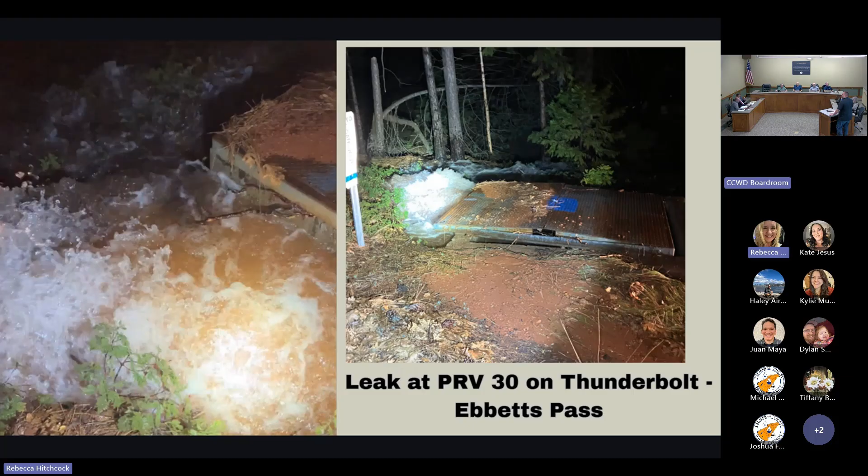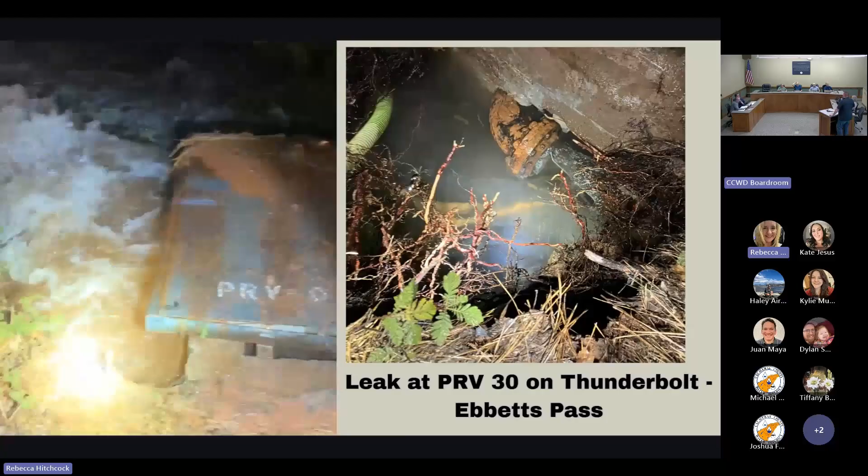Another video. When this first happened, there was about 250 pounds of pressure coming into this PRV. So when the line first blew, as you can kind of see, it picked up the metal lid on the vault and moved the lid off of the vault.

I think we got the alert because we were losing sawmill tank. So the guys went out and had to drive the area to try and find this. I believe Gabriel, our treatment plant operator up there, was driving down Mustang and actually heard it from his truck.

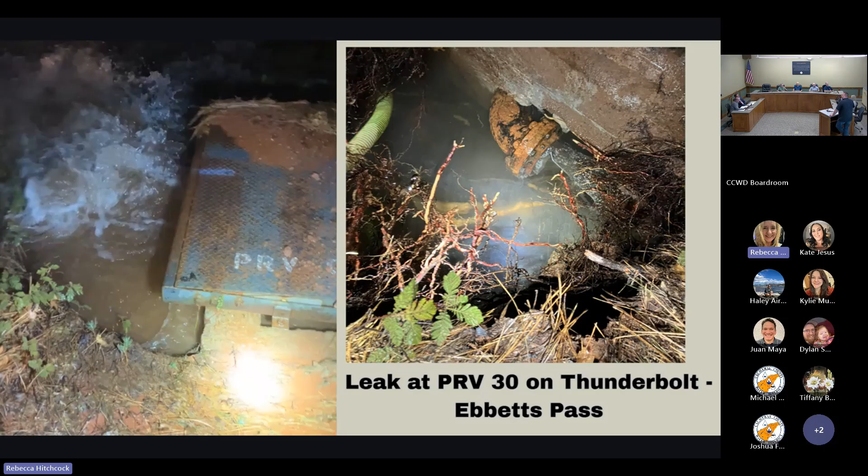That's how we located it. That was a 6-inch inlet line that feeds this PRV.

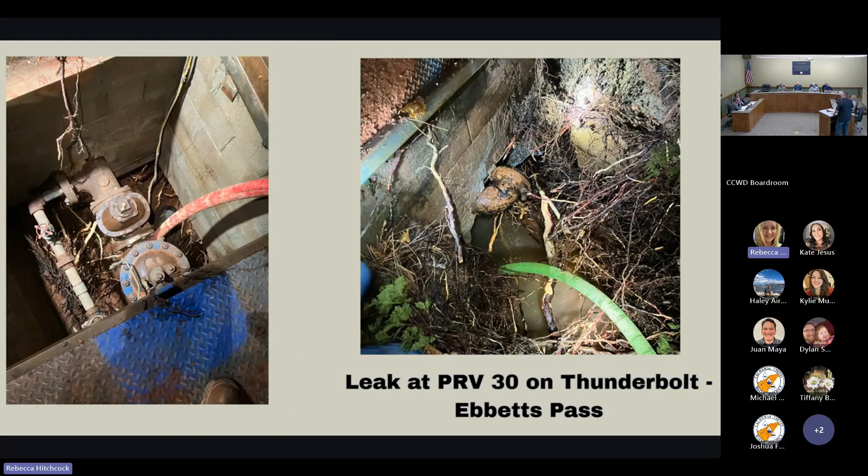When the guys first got there, you can kind of see the hole on the left. They had to dig that hole out about 12 to 15 feet deep. Once they got it shut down and isolated, they had to backfill that hole with road base just to get it to a level where they could get in there and work on it.

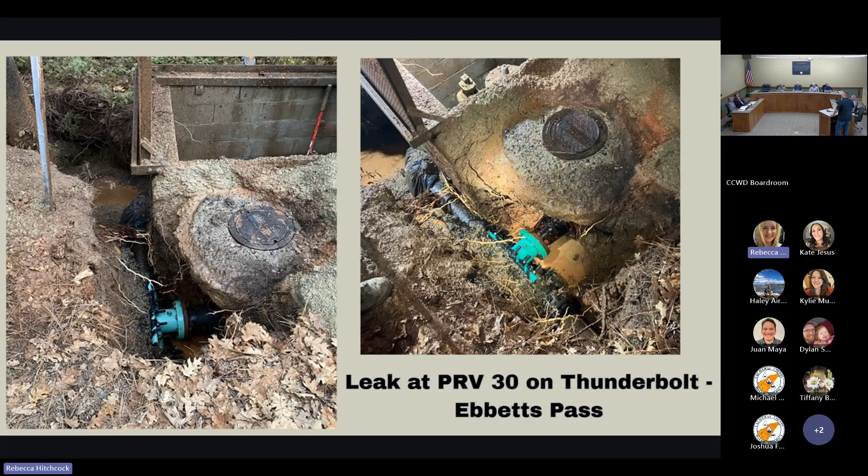You can see there's the hole there. It was an old 6-inch steel pipe that was pretty pitted and just rotten. We believe close to 700 gallons a minute were blowing out of that hole, so it was a lot of water.

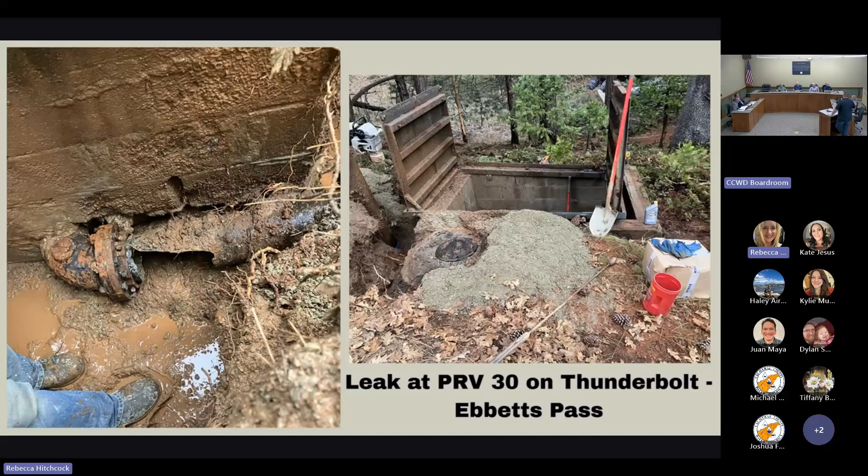Luckily, the area it was at, we had excellent drainage. Couldn't ask for better drainage for a situation like this. So that part was good. We didn't damage too much.

That means there's no claims for this. We didn't damage anyone else's property when that broke. We did not. Remarkable. So yeah, there's another picture of the hole in the 6-inch pipe.

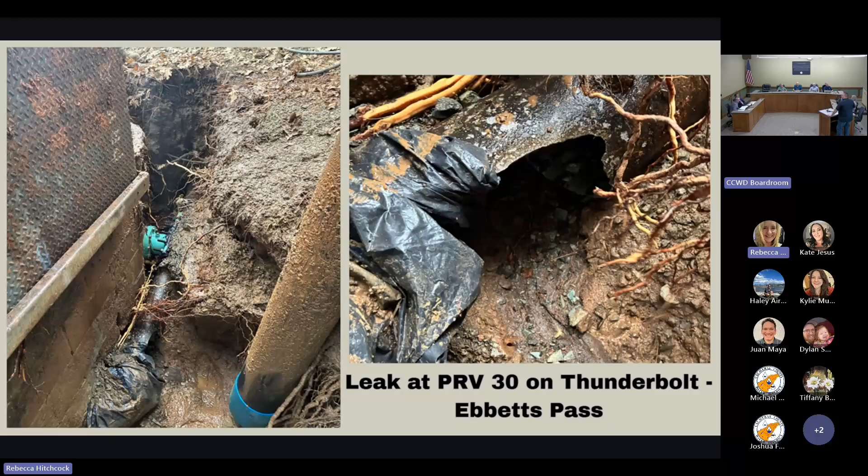How old is that pipe? Other stuff, probably the 70s. Yeah, early 80s. And we've got miles of pipe like that.

Oh yeah, we're going to be doing these every couple of months. Well, hopefully not. Yeah, hopefully not. We just got rid of a lot of the old steel down the Reach One project, so that's good.

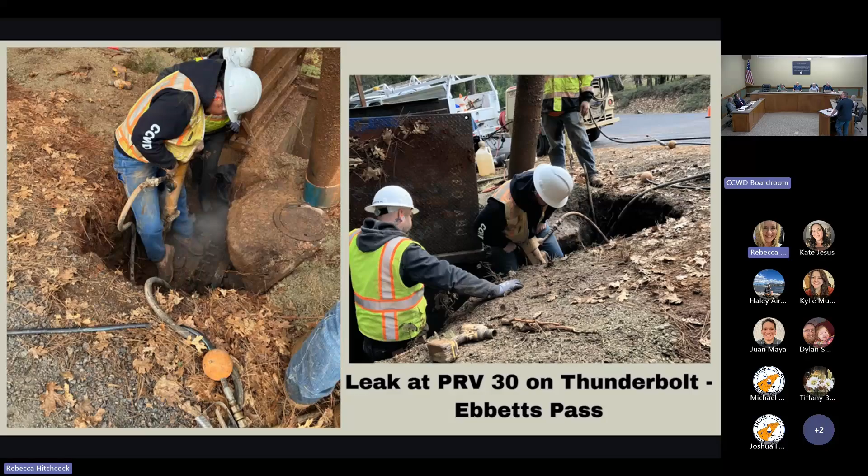So there's just the work efforts, guys trying to get in there to replace that section. There's the new section. If you can see on the picture on the right, there's a cutoff pipe up at the top of the picture.

That was the old temporary bypass for during construction. That's how they were feeding that. So when they put the new line in, that just became a dead end, so the guys just cut that and eliminated that section.

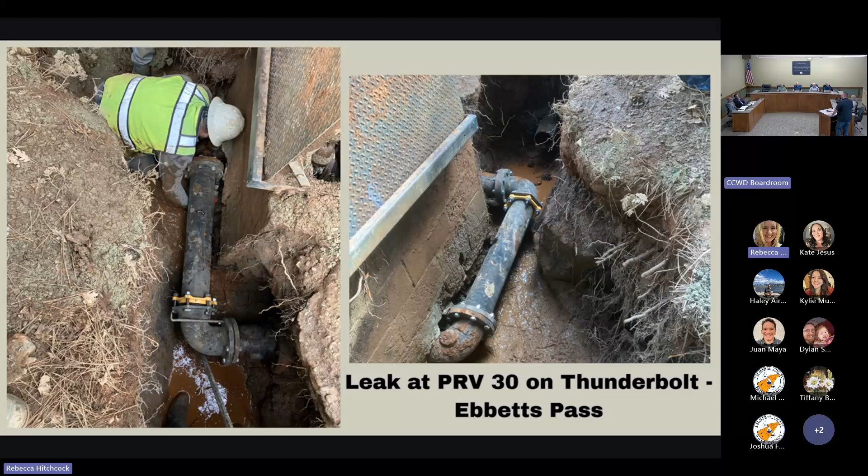There's another picture of the new install. Once they fixed that and charged the line back up, we realized there was an old 12-inch seismic fitting, a 90, on the other side of the PRV vault in front of it, and that was also leaking.

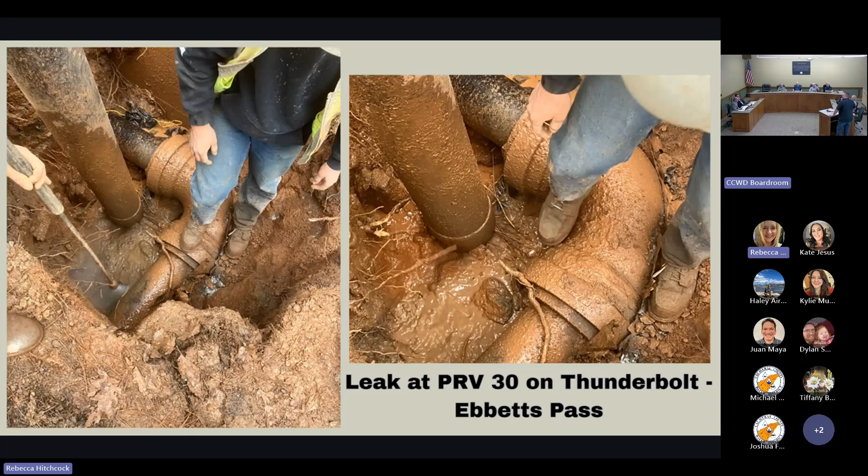So once we got everything else repaired and fired it back up, we realized we had a leak on this also. So then the guys went in to start replacing that, eliminated that old 90, and put an 8-inch ductile 90 in.

That's the old piece there on the right, and that's all the new stuff on the left. This is kind of the way it feeds into this PRV: the line comes, it tees out of the 16-inch main, comes to that 90, 90s down along the vault, then 90s to the other side of the vault where the first repair was, and then 90s into the vault. I'm not sure why there's so many 90s in that small section, but that's how it is.

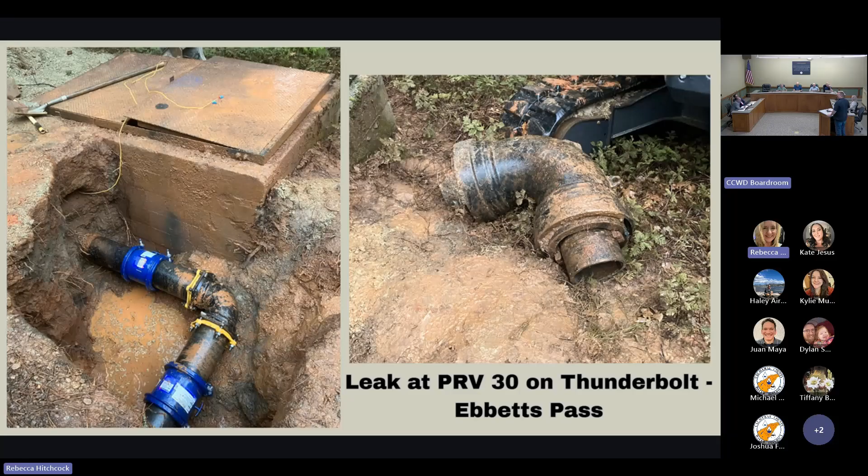So we have that on the books, to go back one day and hopefully replumb that, how it comes into the PRV, so it's more of a straight shot. When the pipe breaks, it significantly reduces the pressure, doesn't it?

Oh, yeah, absolutely. Reduces the water going up to fill your tank also. Man, the tough engineering questions today. I know, right? That one was a lot tougher.

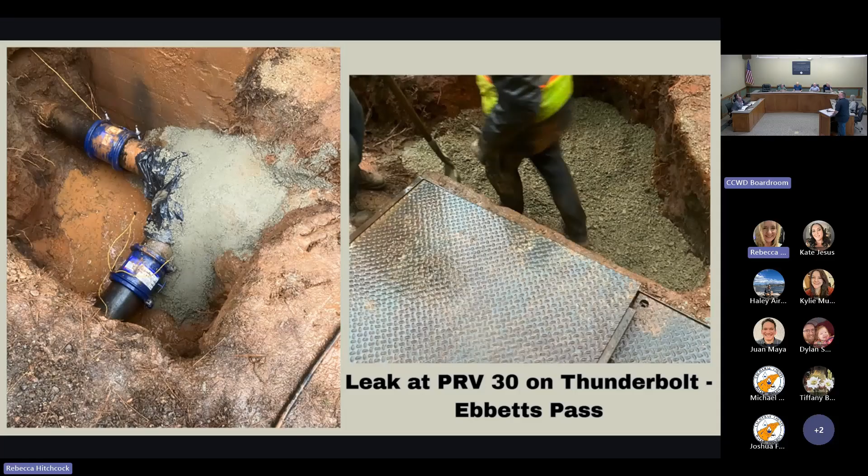So here's the repair on that. Oh, look at that, the guys poured the kicker. Had a couple issues with that one, but we got it buttoned up.

Just something to point out, if you notice, these pictures were all in order. So the first round of pictures was in the dark, and here's the last part of the pictures, in the dark again.

What's that full circle clamp? That was, so if you see the Hymax that's to the left of it, we originally had a Hymax on there. Like I said, there's 250 PSI right there. So the Hymax wasn't cooperating very well.

So we had already poured the kicker, everything was set. So instead of having to pull that kicker up and take everything apart again, we just kind of slid the Hymax back and the guys put a Versa clamp. That's the full circle clamp. They put one of those on there and that held up. So, collateral damage.

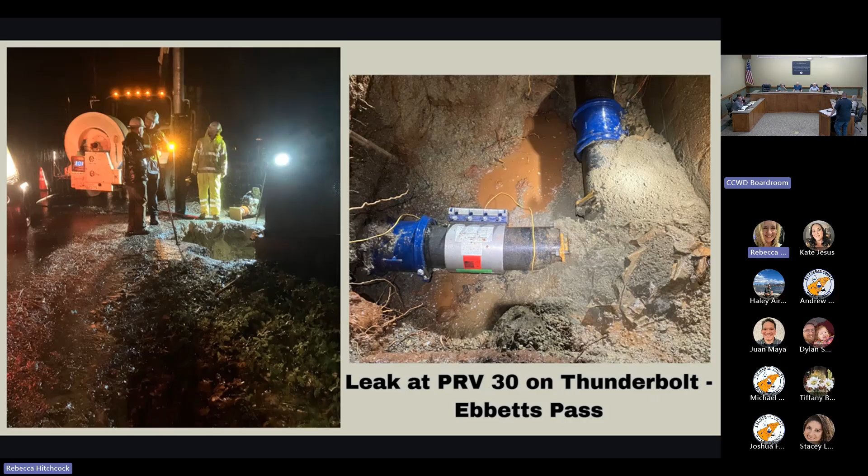All right, so that's just more of the final touch-ups. We got the lid set back on. Made a little mess in the road, but that was an easy cleanup. So the guys went through and cleaned up the road afterwards.

That's it, sitting that close to the road? That was below, so the PRV sits on the corner of Mustang and Thunderbolt. And so that's Thunderbolt down below the road. That's a DI, a county DI, that's in the picture right there.

And then Pat, before we move on from this, real quick, because we've talked about this effort a little bit before, but to see the pictures of it, I think in the video really brings it into focus for folks. And real quick, shout out to not only Director Robertson, but the really friendly neighbors who brought a bunch of burritos for the guys that evening. It was much appreciated too.

But I think this is almost like a case study for what we've been trying to educate ACWA, and then legislators and regulators, about how rural water systems like the Ebbetts Pass system in particular shouldn't necessarily be subject to the same water loss standards as urban areas. And obviously this was a huge blowout.

So we knew about the big blowout, but what we also know now is there were probably leaks going on in all of those for many years that we had no way of knowing about.

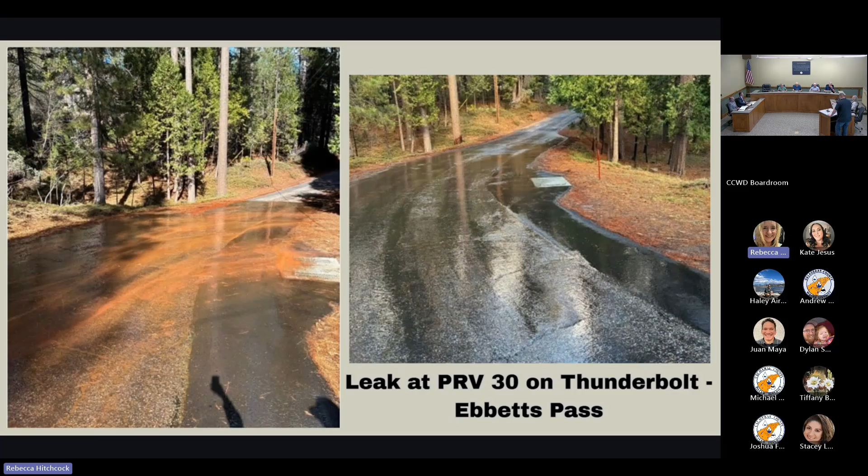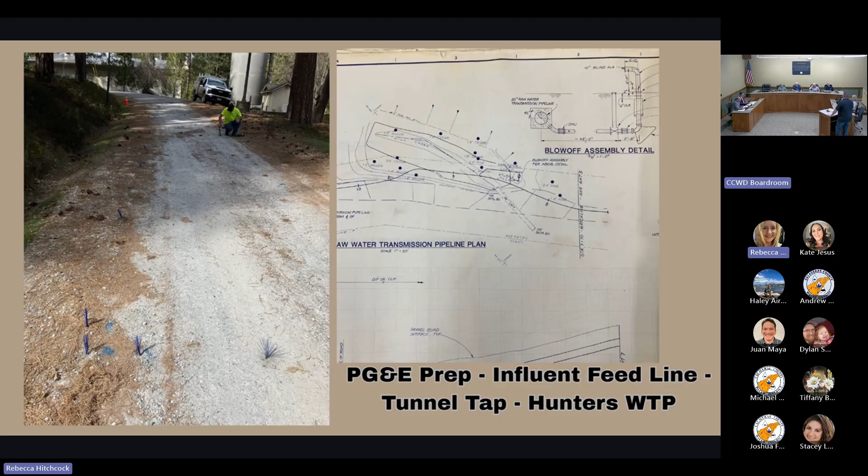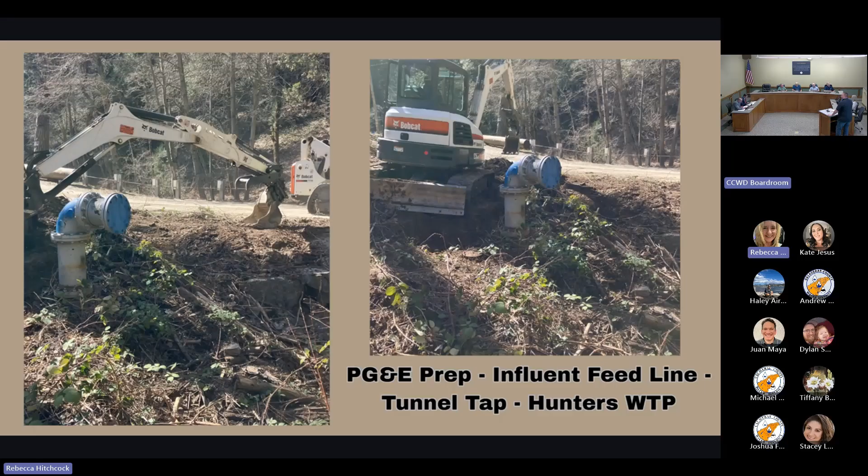So what could go wrong, right? The guys went out, did an extensive effort on locating that line, coordinating with, I believe KW Emerson's doing that job. So coordinating with the foremans that are on site, making sure we're all in close communication. They also did some cleanup, like a blow off, and there's some valves in there. So the construction crew helped. They did some cleanup just to clear all that out to make it easier for the guys to mark that line out in certain areas.

The picture on the right looks like some of the PG&E work. It looks like red tape on top of there. That's the conduits that they're installing.

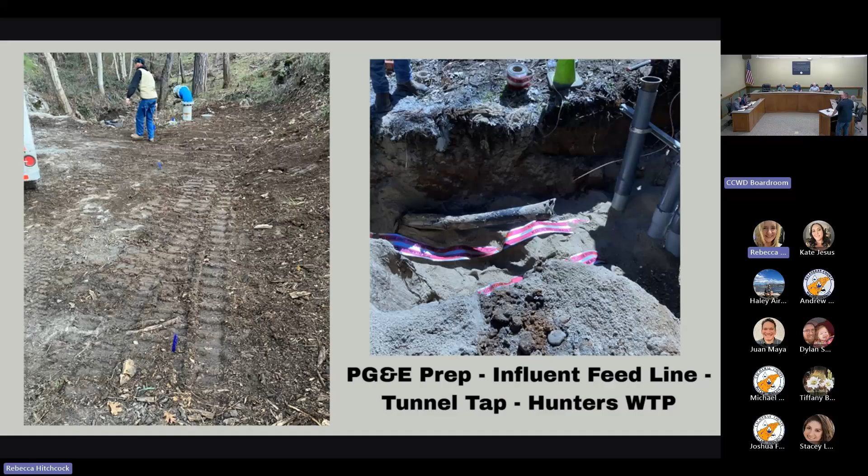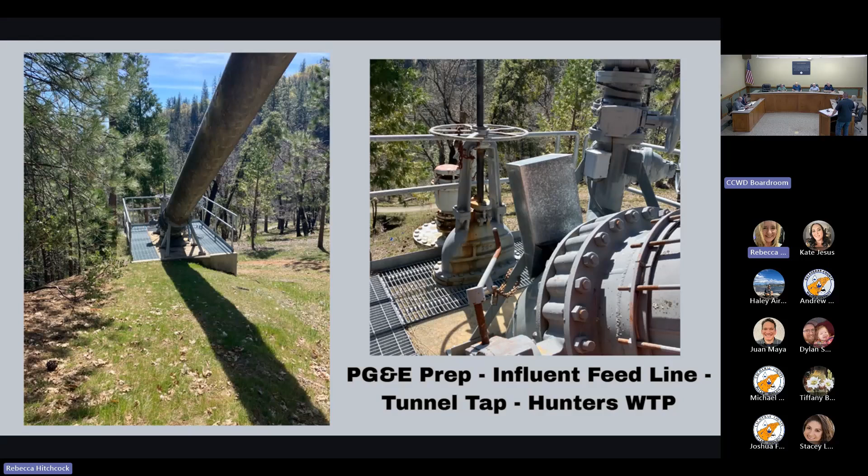And then this is the tunnel tap up at the top. So that valve that you can see in the picture on the right is what would shut that line off if anything were to happen. I think it'd been a while since it'd been exercised. So the Ebbetts Pass distribution guys coordinated with our treatment plant operators, and they scheduled a day where they were able to close that valve, make sure it worked, verified that way, just in case we know we can at least shut it off. So everything went good on that. So far, so good on the project.

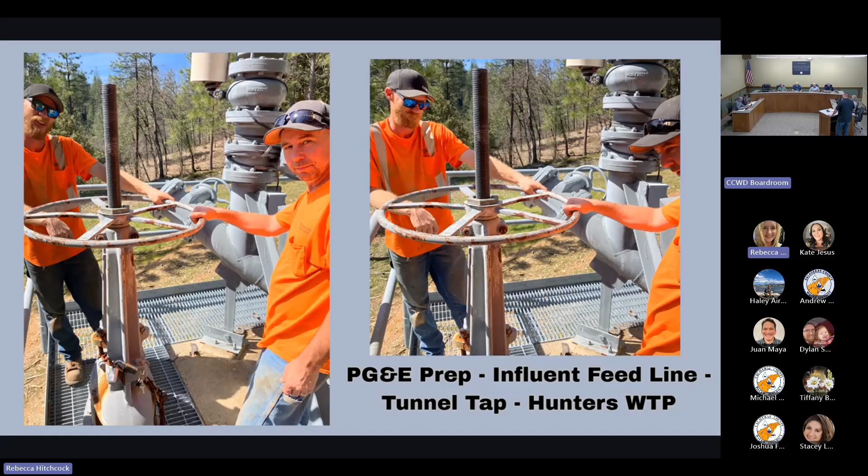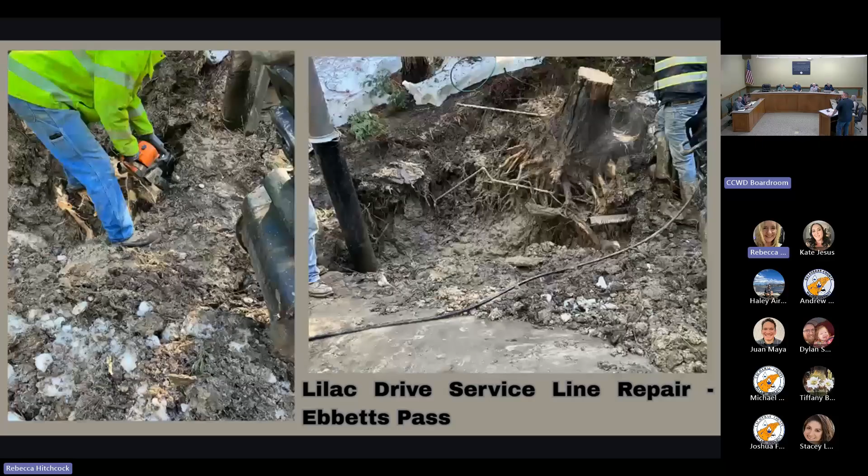This is up in Ebbetts Pass still, little storm damage cleanup. A tree fell, ripped some service lines out of the ground. So these were kind of after efforts. Once the chaos kind of settled down, then the guys are going around and replacing these kind of issues. So they had to cut some of those trees out of the way, dig all that up, and totally replumb both of those services, cutting some of the roots out of the way from that down tree.

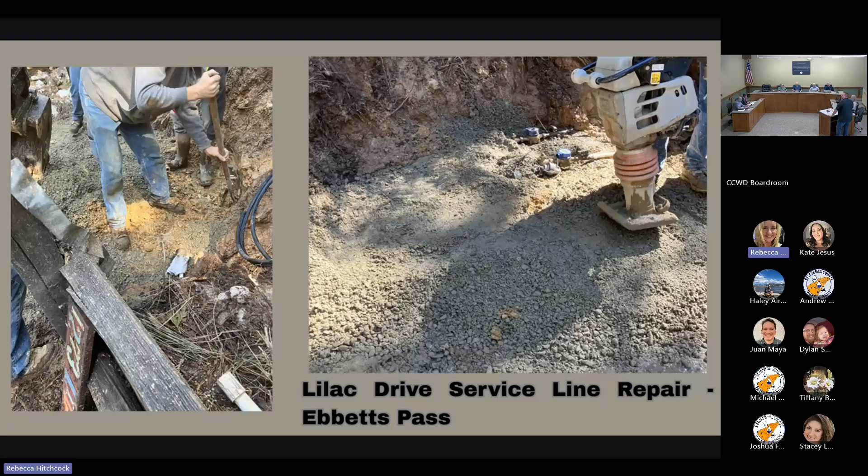And then there's kind of the finished product. There's the 2 meters that they reset. Everything was plumbed back and then set new boxes. That one was a pretty good work effort on that one, just because all the roots.

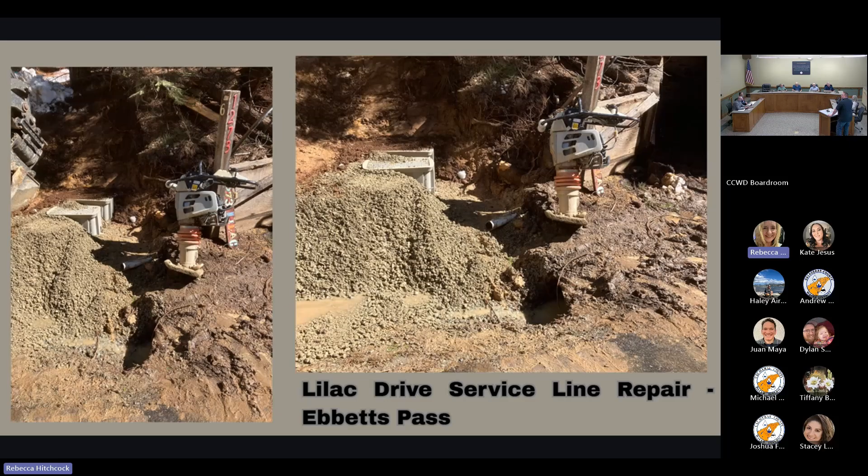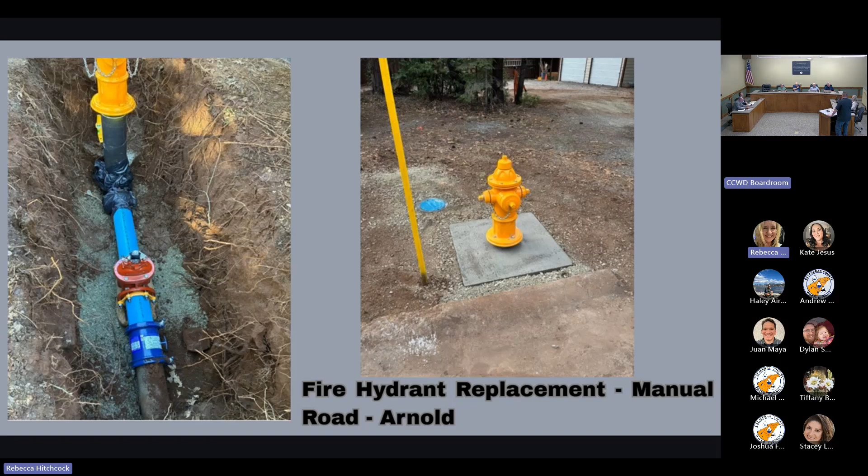This is more fire hydrant replacements. This one was on Manual Road up in Arnold. Crews continue to go through and replace hydrants as we find them that are broken. And then they also, if they don't have a guard valve, we install a guard valve. That way we have a way to isolate those hydrants. Those work efforts continue as well.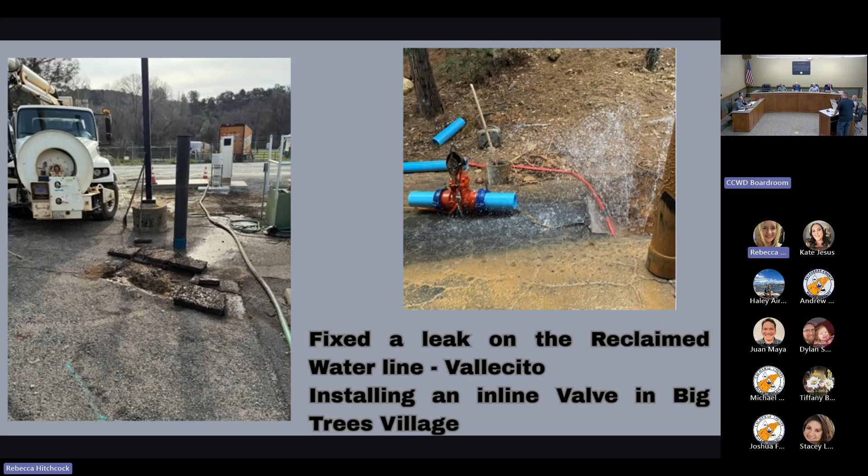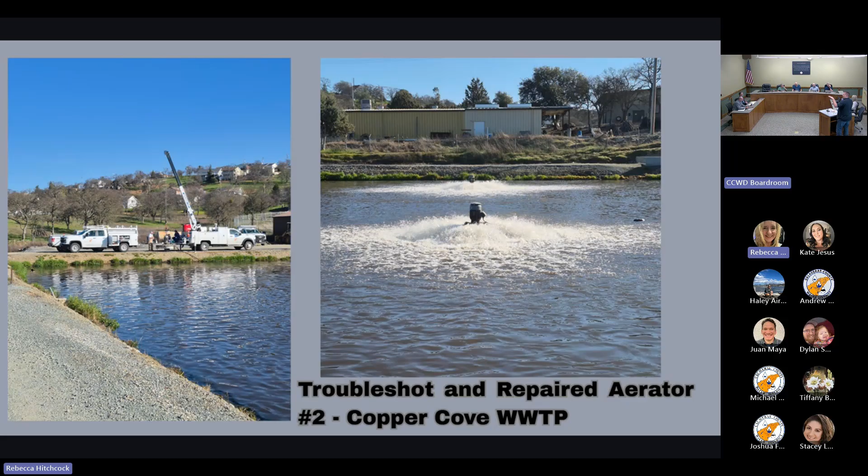And then this troubleshoot and repaired aerator number 2 at Copper Cove Wastewater Treatment Plant. So it looks like probably the mechanics and the electricians in the picture on the left there. The mechanics use their crane trucks to pull those aerators out of the ponds. So they did some work on that.

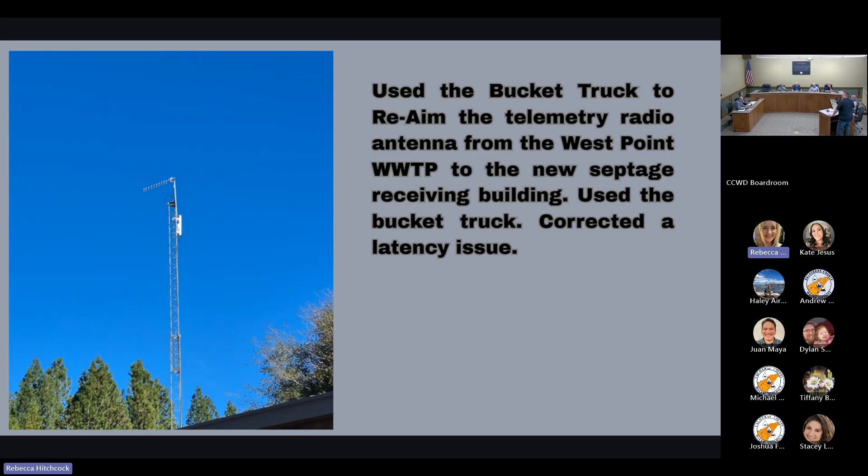This one was the mighty bucket truck used to re-aim the telemetry radio for West Point Wastewater Treatment Plant to the new septage receiving building. So Damon just climbed right up there and turned it.

Let's see, this was some electrical work. This was, we were having a failure at the Huckleberry lift station. The pumps weren't alternating, so the electricians went in there, diagnosed that and corrected that issue in the PLC.

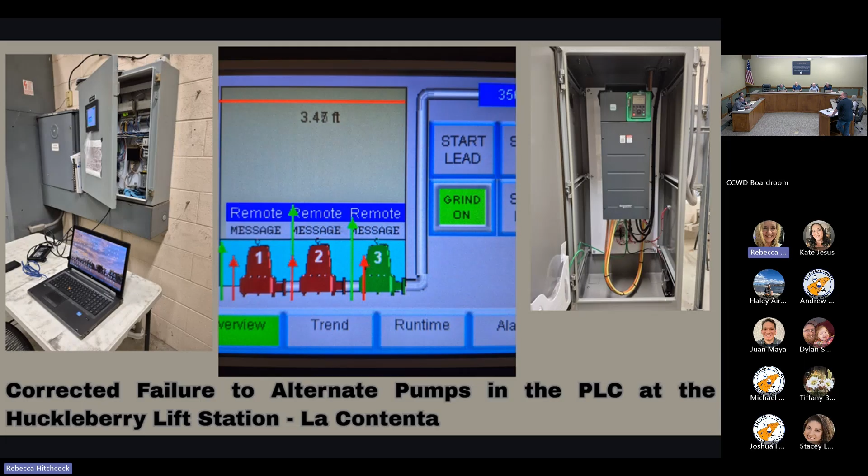This corrected some trending issues on SCADA computers and cleaning up some old equipment at the Copper Cove Water Treatment Plant.

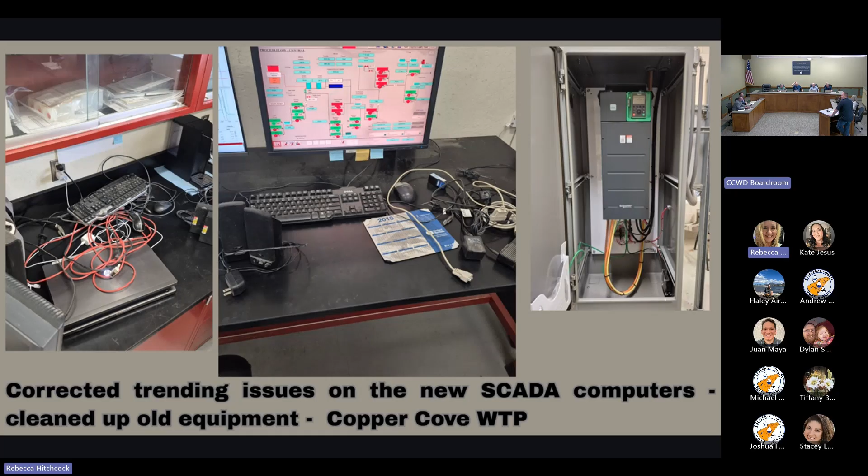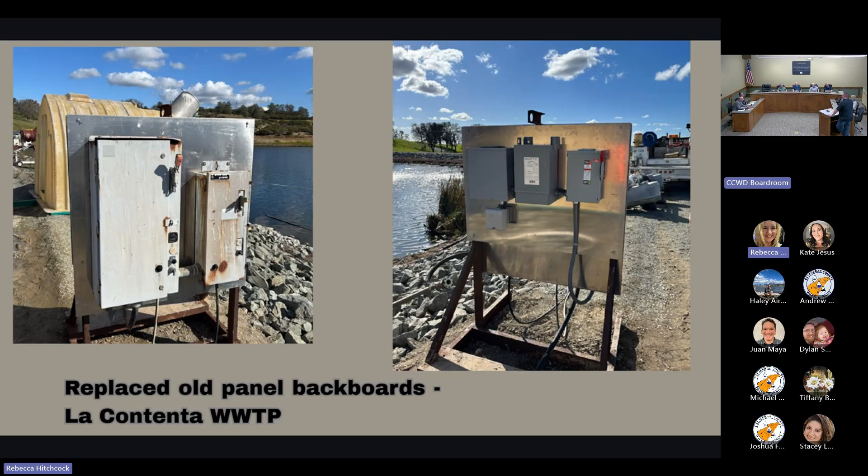More electrical work, replaced old back panel backboards at the La Contenta Wastewater Treatment Plant. Those old back panels were probably plywood and rotted, so they put some stainless steel ones on there.

And then this is the electricians adding new level transducers to the new Copper Cove B tank, the number 2 tank up there.

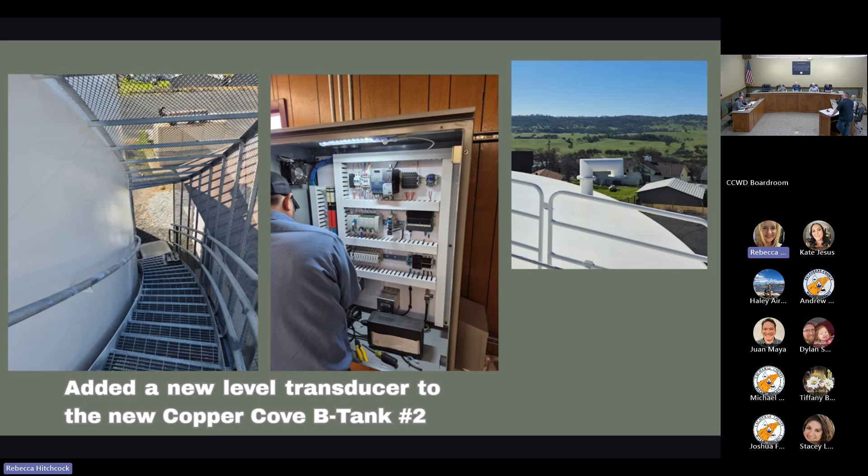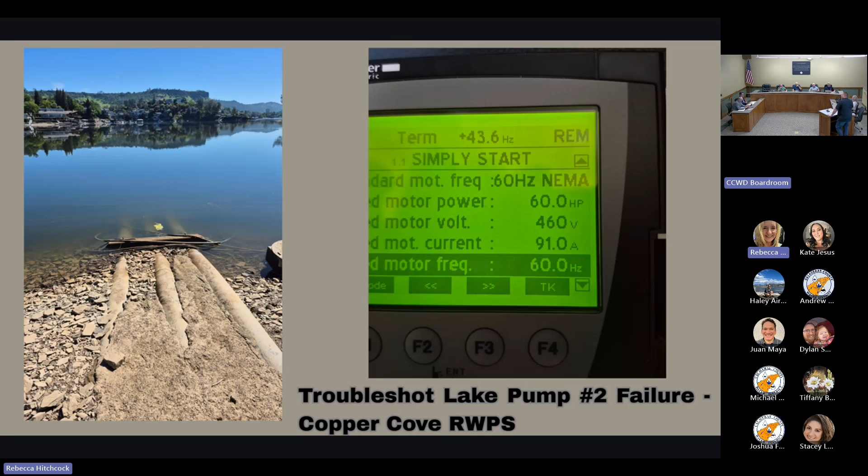And then this was, we had a pump go out, one of our lake pumps in Lake Tulloch. So pump number 2 failed at our Copper Cove raw water pump station. So right now we're down a pump. This was the electricians troubleshooting some of that.

Do we hire someone to do diving? Yeah, do you know who does that? Modesto Irrigation District, MID. A couple, oh, MID, okay. Yeah.

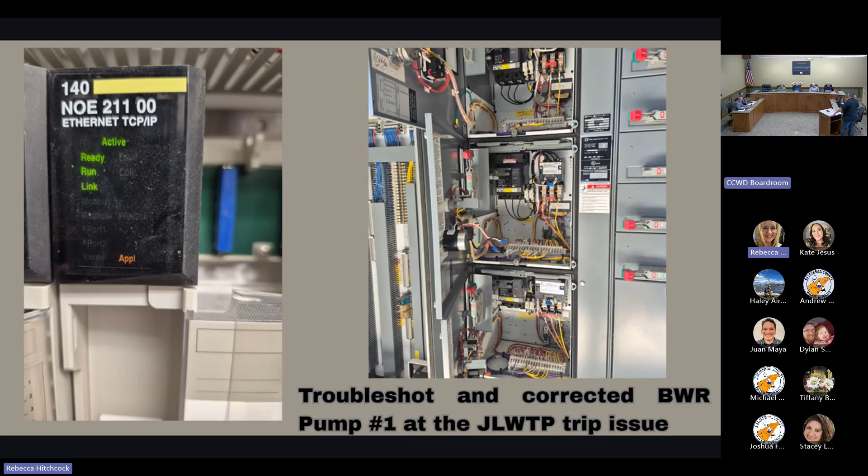This was the electricians troubleshooting and correcting a high-level call-out issue on lift station 10 in Poker Flat. There's some other slides you'll be able to see, but the issue we had was the pumps got ragged up in the lift station, and when the lift station got to a high level, it didn't call out. We actually had a near miss on this one because it's right on the shoreline. It was found just in time before it spilled.

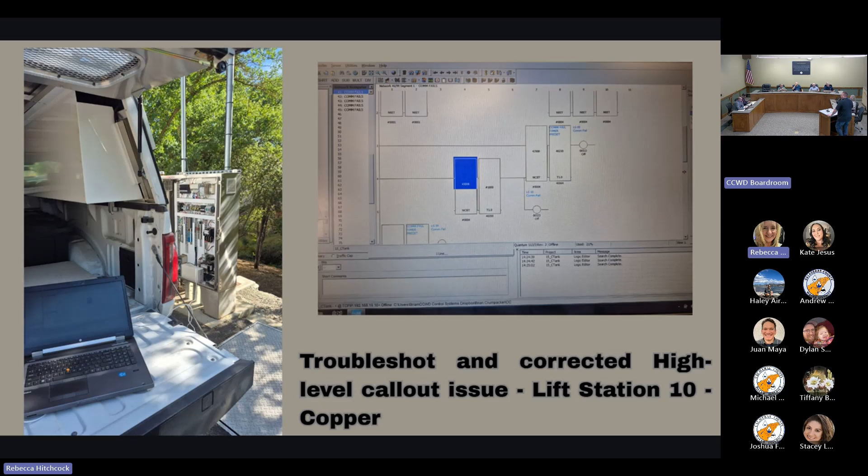How was it found? I think during lift station checks, the guys went around and found it. Oh, during their weekly checks. Yeah, so the electricians repaired that.

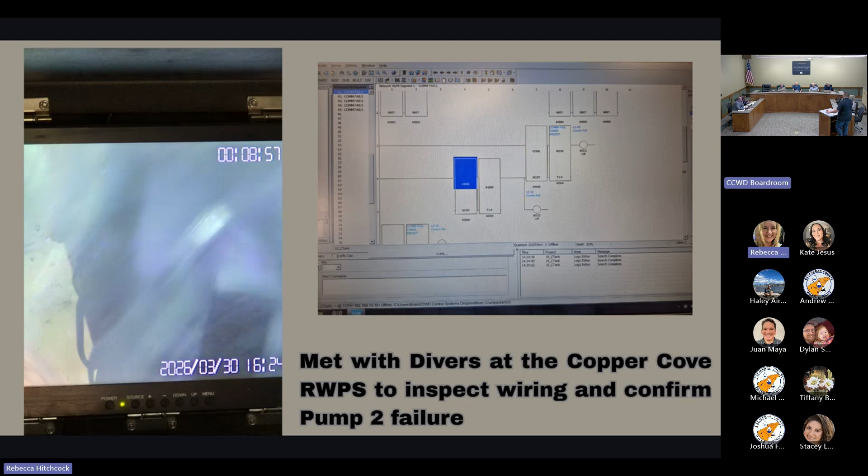And then here's some pictures of those ragged up pumps at lift station 10. As you can see, they're just completely plugged with Swiffers, wet wipes, all the above.

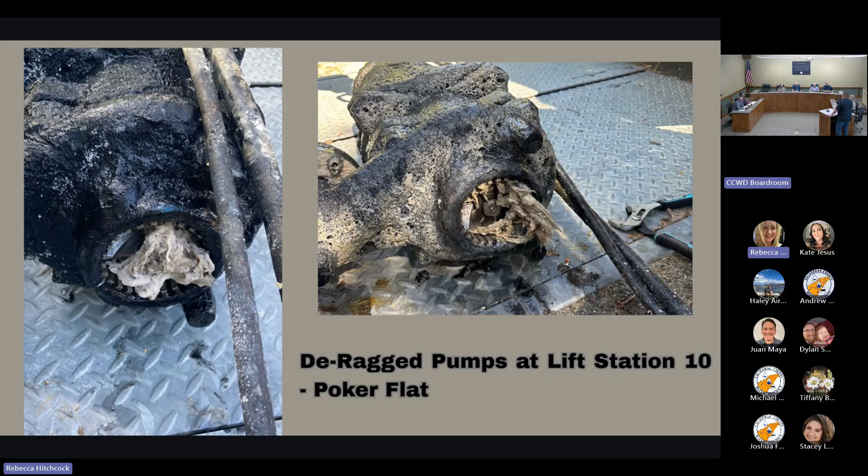So we put out some notifications, had some door tags made here in the office. The crews went out and passed out door tags for the homes from that location. Do you know which homes are doing it? There, we can narrow it down. There, I think there were about 20. So we went out and actually door tagged those 20 or so homes, that way everybody got the notification - letting them know you did this.

So there's another picture, you can see just how ragged up they are, but there's a picture in here where there's actually like a washcloth or kitchen towel that's ragged up in the impeller in the pump. I don't know why anybody would flush that. How did it get down there, through the drain? Wow. So hopefully the notifications are going to help, because the guys had to go out there 2 or 3 times within a couple weeks and derag those pumps.

So hopefully we can improve that. And that damages the impellers? It can. With these, they don't - the guys just have to pull it all out and get it untangled, and then it usually works fine after that. Well, those chopper pumps or whatever, does this get through that? What's that, the chopper pumps? Yeah. These aren't chopper pumps, I don't believe, in this lift station. But something like that could probably give a chopper pump an issue too.

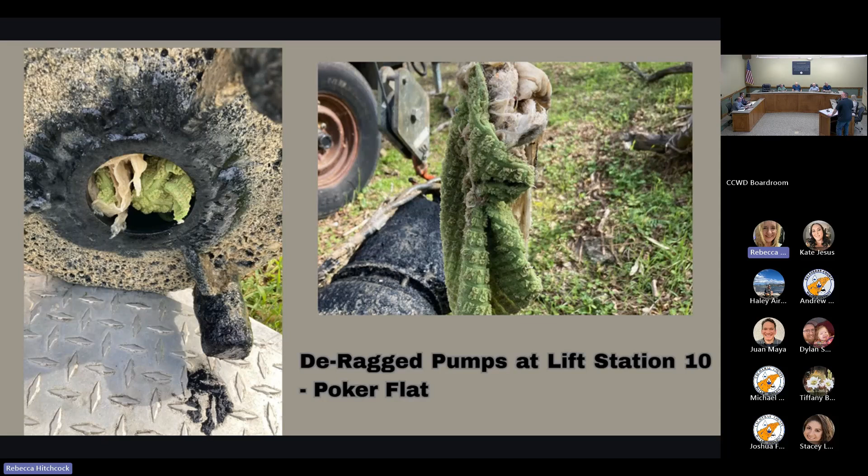And then this is a filter rehabilitation project over at Copper Cove Water Treatment Plant. So they're rehabbing the filter. I think all the metal and everything look good, right? Is that the last word I heard? Okay, so that project's moving forward.

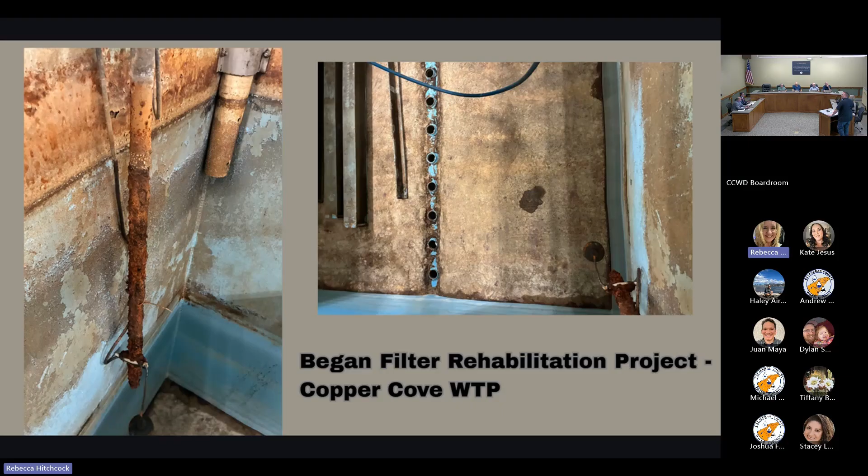And then this is Dave on the left, he's one of our operators over in Copper Cove, and that's Clinton on the right, he's one of our construction crew members assisting Dave. They're changing the bulbs in the UV maintenance at the Copper Cove Reclaim Plant.

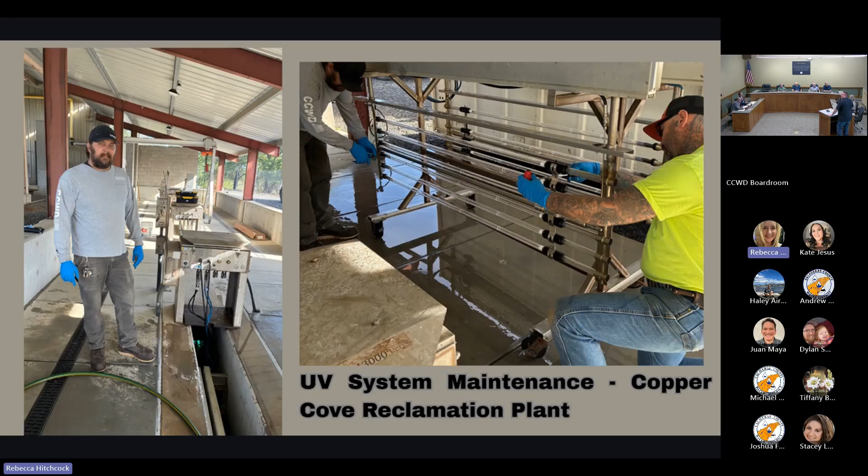And that was it. Any questions?

Thank you, very nice, thanks for stepping in for Damon. Yeah, oh, you're welcome, thank you - I'm not as good, but hey, you know. I don't know why you say that, it was a pretty good report.